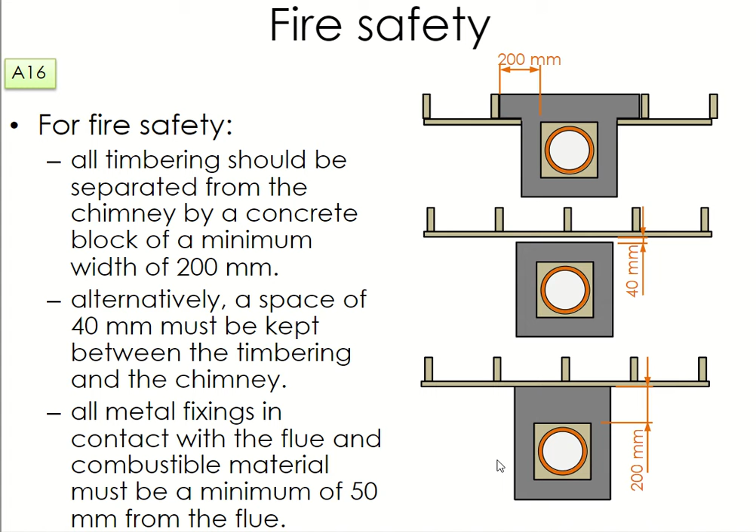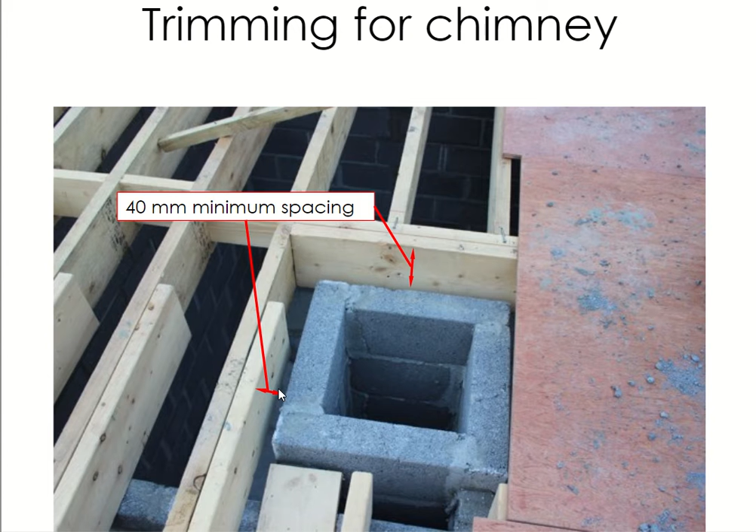Okay, so this is just kind of a real image of it. So you can see this is your fireplace or your chimney even being built up with your normal concrete blocks. You can see there's a gap here between the timber and the chimney of 40 millimeters, and that will be at all 4 sides.

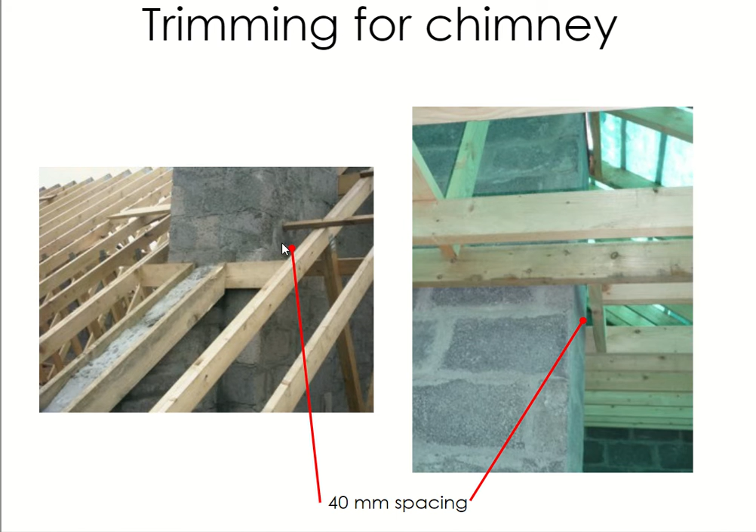Moving on to the top of page 96, we're on 17. So we're talking about a party wall. So what is a party wall? A party wall is a wall that's between 2 neighbouring buildings. So if you live in a house that's attached to another house, there'll be a party wall in between them. It's basically just a thicker wall, and the idea is that it reduces noise.

So it's vital that if there's a fire in one of the buildings, say in house A, that it doesn't go straight into house B because they're attached. So by building a party wall, we want it to be able to prevent a fire spreading from one house to the next.

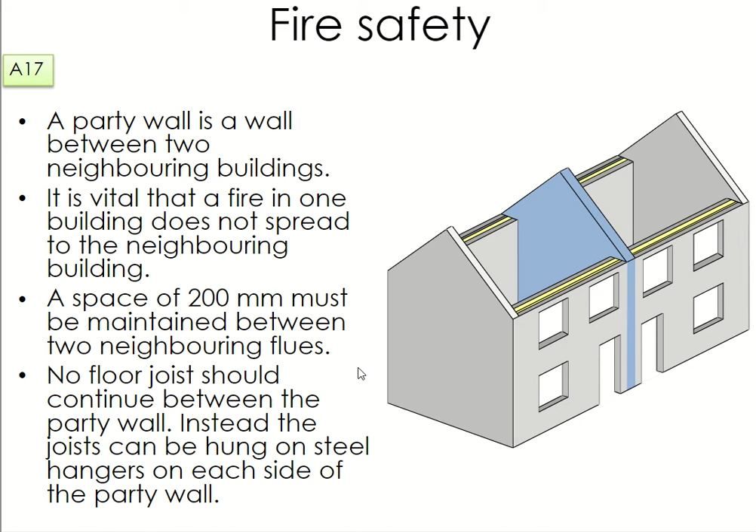A space of 200 millimeters must be maintained between the neighbouring flues. So imagine this is the party wall, and there's a chimney in house A, or a fireplace in house A, and on the other side of the party wall, house B has a fire. The 2 chimney flues need to have a gap of at least 200 millimeters between them, so that if one chimney was to catch fire, they'd be less likely to affect the other one, unless it was very severe.

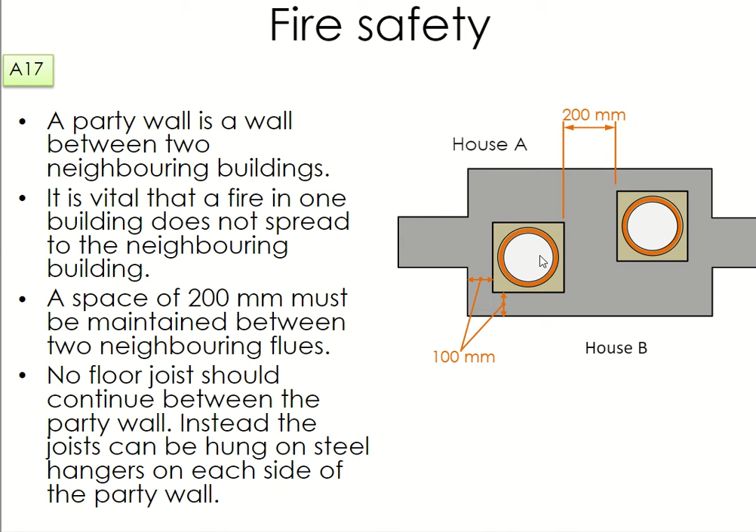And no floor joist should continue between the party wall. Instead, the joist can be hung on steel hangers on each side of the wall.

What the final point means is that the timber joists from house A should not go straight through to house B. They should have separate joists, or that goes for any piece of timber - separate pieces that should not go into the next house in case they catch fire. We use a steel bracket that fixes them to the party wall instead. The idea is that the party wall is a complete divider between house A and house B.

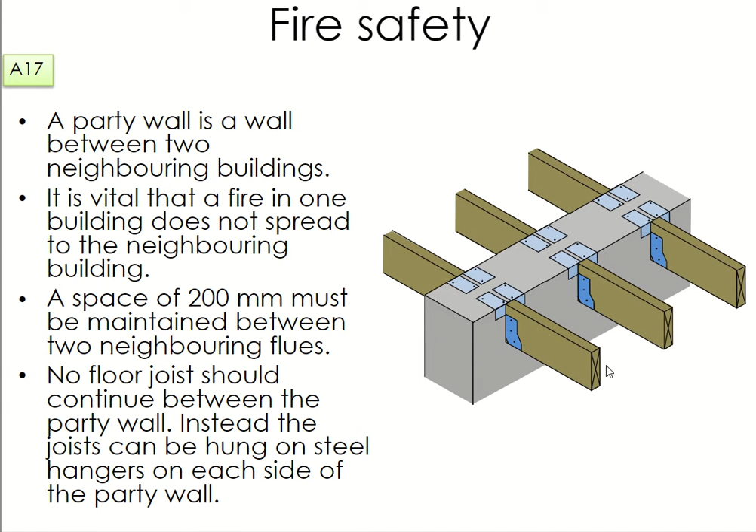Moving on now to 18, which is looking at carbon monoxide. Carbon monoxide is being described as the silent killer. So in that section, what do you need to do? You need to explain what carbon monoxide is and how it can be created in your house. I'm sure everyone has an idea of what carbon monoxide is.

It's a gas that is released mainly from burning fuel. It's a poisonous gas, and the thing about it is you can't see it, you can't taste it, and there's no smell of it. Just to go through the points here quickly, and you can write them in your book: when fuel is burned, carbon dioxide is produced. Carbon dioxide is made up of two molecules - this is kind of scientific - oxygen and carbon. It's not too important that we know that, it's just there for your own learning.

What we do need to know is when fuel is burned and starved of oxygen due to poor ventilation, carbon monoxide is produced. So if you have a fire in your house, fireplace, and you're burning turf or coal, and the fireplace doesn't have adequate oxygen coming into it, there's a very high chance that carbon monoxide could be produced and present in your house. It's a poisonous gas, it can be fatal, and as we said, it's colourless, odourless, and tasteless - you've no idea it's there.

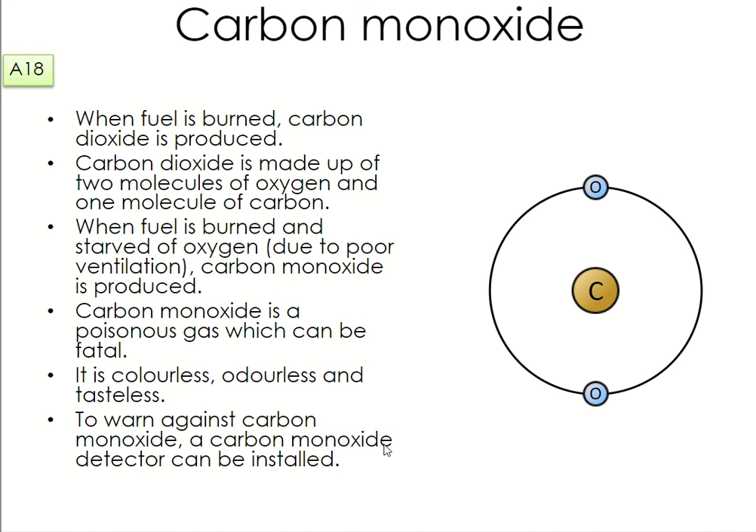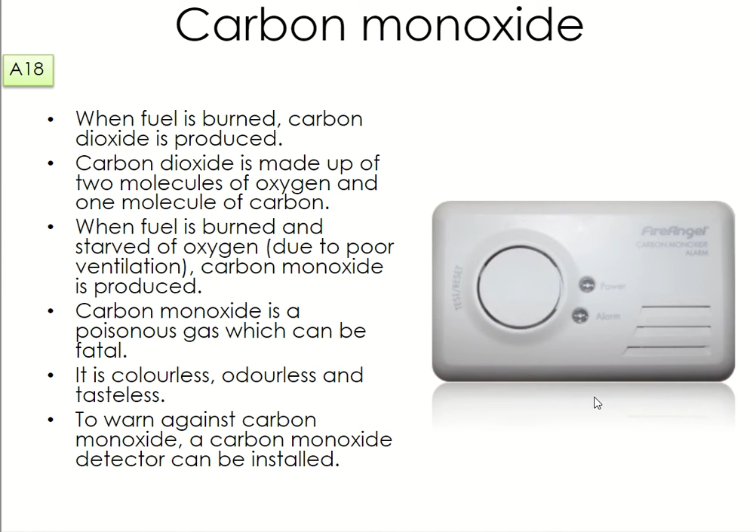This is 19 - carbon monoxide buildup can be prevented. We have 6 steps for preventing carbon monoxide. First, we can ensure that all boilers are regularly serviced - so if you have a back boiler behind your stove or range, it should be regularly serviced. Ensure that the fire has adequate ventilation, so every fire you have should have ventilation. An open fire would obviously have ventilation, but if you have a stove or some kind of enclosed range, you need to make sure that there's ventilation getting in.

There is usually mechanisms on a stove that allow you to increase or reduce the amount of air or oxygen that gets into a fire. Install wall vents - so if you have ventilation, wall vents, or open your windows, window vents, or any kind of vent. The idea of the vent is that some of the carbon monoxide gas would be able to get out of the house, and at least it would reduce its fatality to the occupants of the house. Finally, all homes should have a carbon monoxide alarm in the same room as the source.

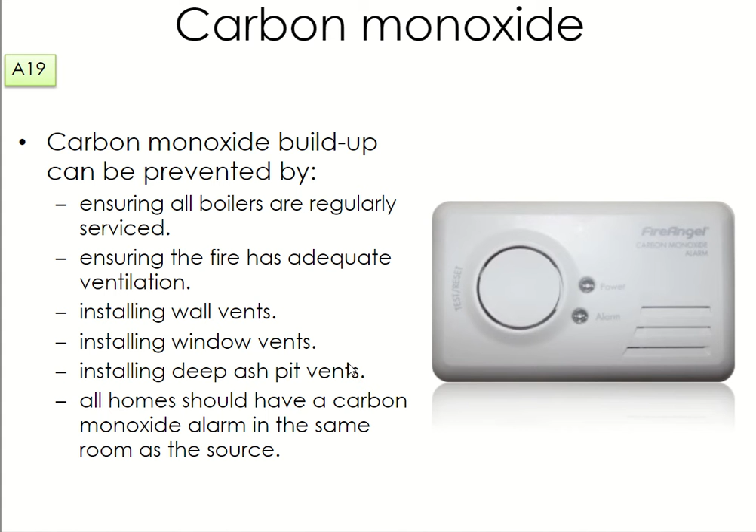So the source would obviously be your fire. Okay,

So now we're kind of looking at wind stability for the chimney, so how high would we build a chimney? Obviously we don't want it to be too high because there's a risk that it'll catch a lot of wind, especially in Ireland. So chimneys must be designed to withstand the wind. The height/width ratio is the most important design factor to achieve this.

So we're talking about the height of the chimney, the back end, usually along the ridge of the house, which is the middle of your roof, the highest point of your roof. And B here is the thickness or the width.

Because the wind is different in different parts of the country, a guideline map is used to determine the sizing of the chimney. In other words, if you live along the coast near a beach area or the sea, it's going to be a hell of a lot more windy than if you lived in central areas, or even in the centre of Ireland, the Midlands. You wouldn't have as severe wind.

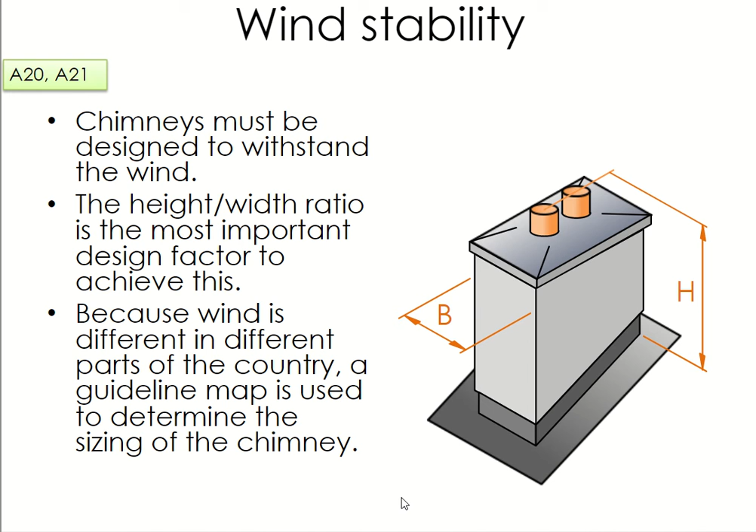So the map they use - as you can imagine, Donegal is on the highest end of the scale, being the yellow. You don't really need to know this, but it's just for your own information. Around the Midlands they would be the best area, and even around the Dublin area would get less wind. Most of the wind and storms that come into Ireland come in from the Atlantic.

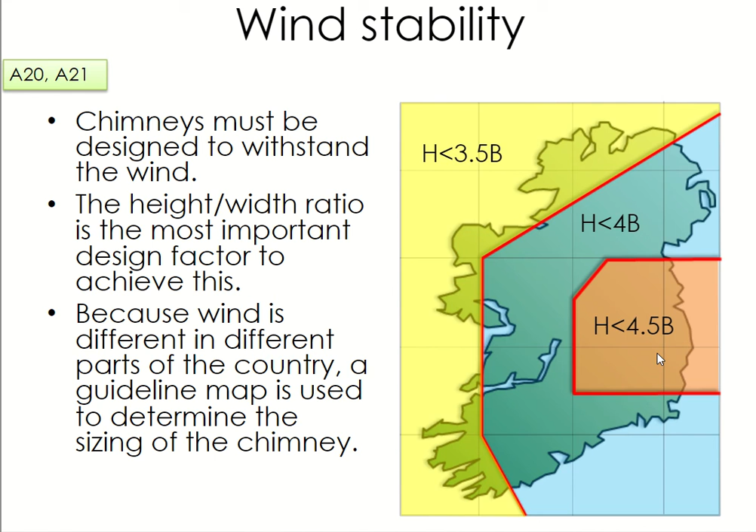So moving on - actually, just to go back, in your book, at the top of page 97 there is this map, and they want you to fill in the missing information: 3.5, 4 and 4.5. That's just the ratio. Again, it's not too important, and you will never get asked that in the exam, but it's in the book, so we may as well follow it out.

Now, moving on to more important stuff - backdraft, so it's on page 97, question 22 and 23 I think.

So when the wind blows against a roof, it creates a zone of pressure and a zone of suction. Here you have the wind blowing in against the house from this side, and afterwards the wind creates a pressure zone. You can see here now, it'll create a pressure zone - basically the pressure zone is on the side where the wind is hitting your house.

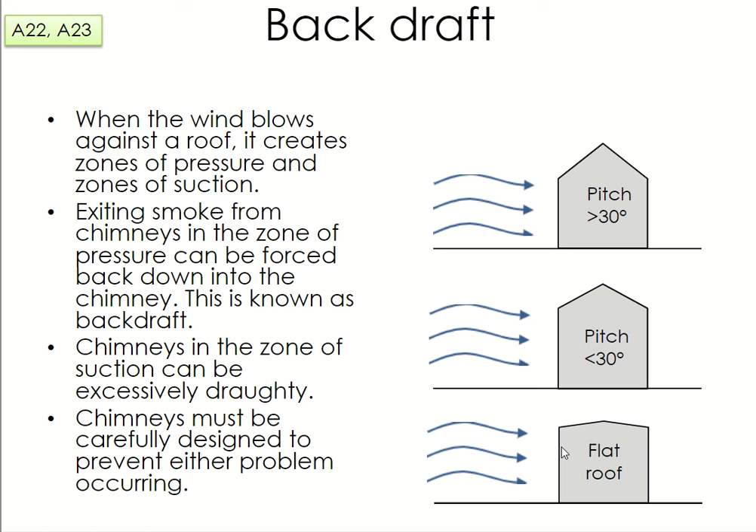So this is the stormy side of the house. You can imagine if the wind's coming in from the Atlantic, from the west, it's going to create a pressure zone. Then on the other side you have the suction zone - if you were to stand there, it'll be a lot more sheltered. So when the wind blows against a roof, it creates zones of pressure and zones of suction: the pressure zone is on the side that the wind is hitting the house, the suction zone is on the sheltered side.

Exiting smoke from the chimney in the zone of pressure can be forced back down into the chimney - this is known as backdraft. I don't know if you've ever heard of backdraft or if it's ever happened in your chimney. Chimneys in the zone of suction can be excessively drafty, so you can get a draft coming down the chimney, and the chimney must be carefully designed to prevent either problem occurring - this is important in terms of the design of the chimney. In other words, this is why the chimney will always be higher than your roof.

It needs to be a certain height above your roof, so that the smoke coming up the chimney doesn't get caught in either zone - the pressure zone or the suction zone. You want it coming out above the roof, so if it does hit any wind, it's above your roof and it'll blow away. You can see in this image, I think it's on question 23, they want you to indicate the zone of pressure and the zone of suction on the three images.

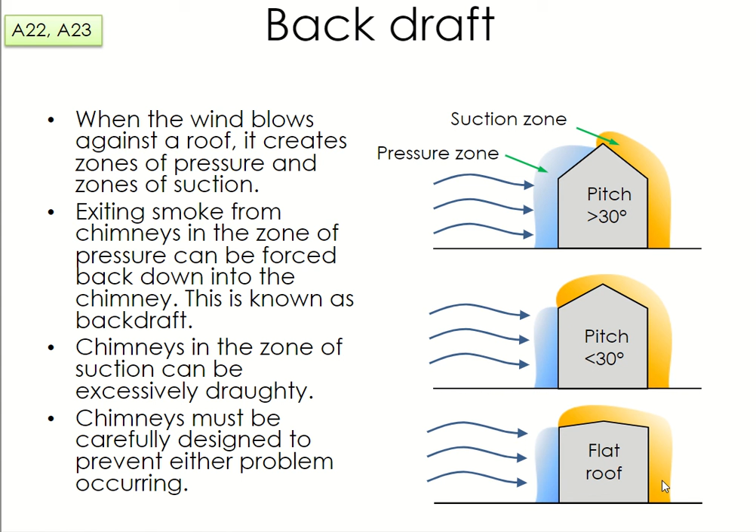You basically just need to highlight the blue area for the pressure zone and the orange area for the suction zone. Again, the suction zone will come up over your roof as well—that's the suction zone. It's obviously different depending on the pitch of the roof: the bigger the pitch, the less likely it is to come over to the other side of the roof. The lower the pitch, or if it's a flat roof, it's a lot easier for the suction zone to come across.

Question 24, bottom of page 97, we're nearly done now. This looks at how we decide on the heights and ratios for the chimney, especially in terms of backdraft. To prevent backdraft, the chimney stacks must be built with a certain amount of clearance from the roof—a certain height above the roof. The height of the roof will be here at the apex or the ridge, which is your highest point of the roof.

For roofs with a pitch more than 10 degrees, in other words not a flat roof, if the chimney is less than 600 millimeters from the ridge, then the chimney must be a minimum of 600 above the ridge. So if we look at the first picture, from the ridge point to the chimney flue, if that distance is less than 600 millimeters, then the chimney must be a minimum of 600 above the ridge line—so the chimney flue must be at least 600 millimeters above it.

If the chimney is greater than 600 from the ridge—you can see here 600 isn't even reaching the ridge in picture 2—then the chimney must be a minimum of 1 meter above the highest point of contact with the roof slope. In other words, the highest point of contact for the chimney with the roof is usually at the back point here.

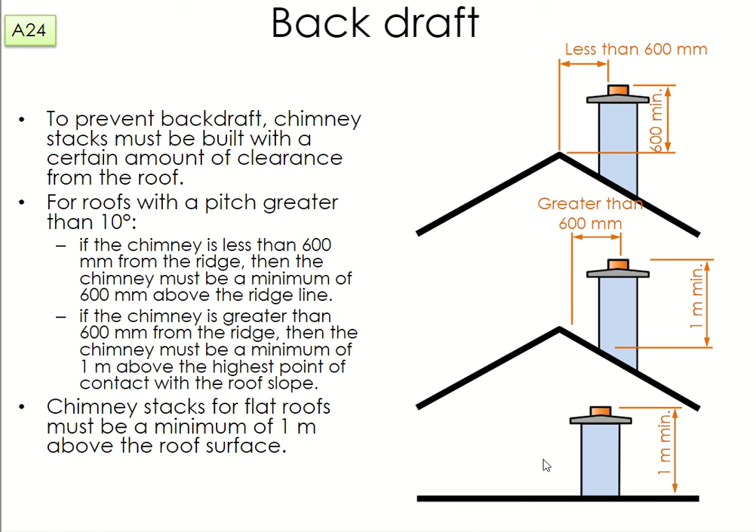Moving on now to the final couple of questions: weatherproofing the chimney.

To prevent damp entering the house, a DPC—damp proof course—tray is used to separate the portion of the chimney above roof level from the internal portion of the chimney. These trays are usually made from lead, so if you look up at your chimney, there's lead flashing going up the wall slightly that connects it to the roof, going underneath your slates or tiles. That's just to stop water coming down along the blocks of your chimney and into your house—so it's a lead flashing. Alternatively, you can buy prefabricated ones.

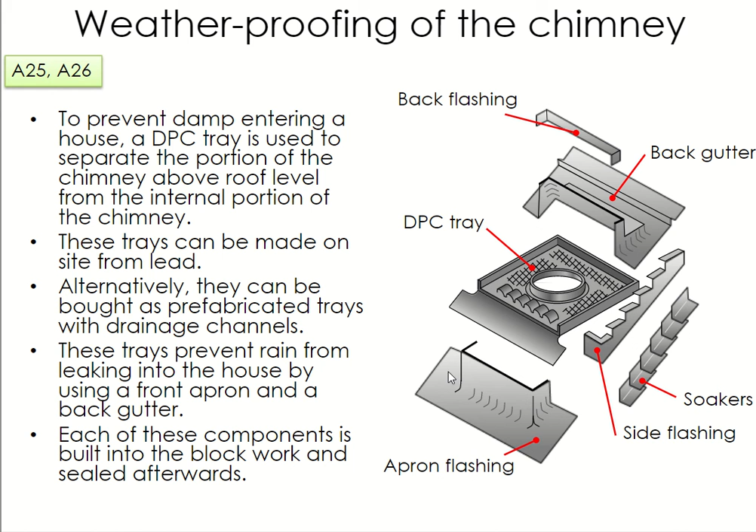So you have the back flashing and the back gutter. You have a DPC tray. You have your soakers along the sides, and at the front you'll have an apron flashing. You also have the side flashing as well. In other words, the flashing is kind of the first layer, and the second layer then is either your soakers or your back gutter in the back. So there's two layers.

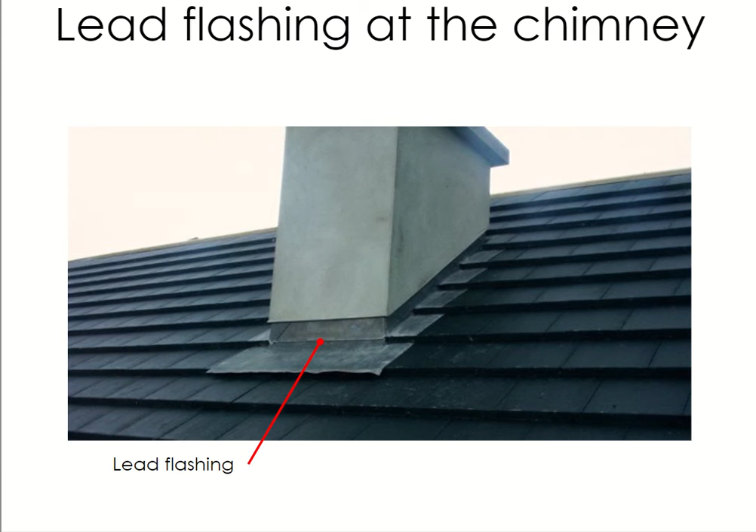Moving on to the final part, which is 27, you have to label and add appropriate measurements to the diagram given on the bottom of page 98. So it's basically a detail of a chimney coming through the roof. Again, we'll do all our detailed drawings when you get back to school in 2 weeks or 3 weeks time.

So you have to label the parts. Number 1 there is the stepped flashing. Number 2 is pointing to the DPC tray. Number 3 would be pointing to the front apron - so this is this area around here. So 3 is the front apron, 2 would be the DPC tray, and the stepped flashing will be number 1.

Again, the missing measurement they want you to fill in here is 150, okay? So in other words, from the point of the blockwork coming out through the roof, it needs to be at least 150 millimeters above before the plaster comes down over the lead flashing.

Number 4 then on the other side, number 4 is the cover flashing - so it's the first layer that goes on. And then the back gutter lead layer will go on top of that, that will be number 5. Number 6 is your tilting fillet here - it's just so the water doesn't come back up the way. This will stop the water from coming up the way, and it also raises your slates slightly.

Number 7 is the gutter board, it's just a piece of wood. Number 8 is this piece of wood in here - it's the batten, okay, it's just where the lead flashing or the lead gutter sits on.

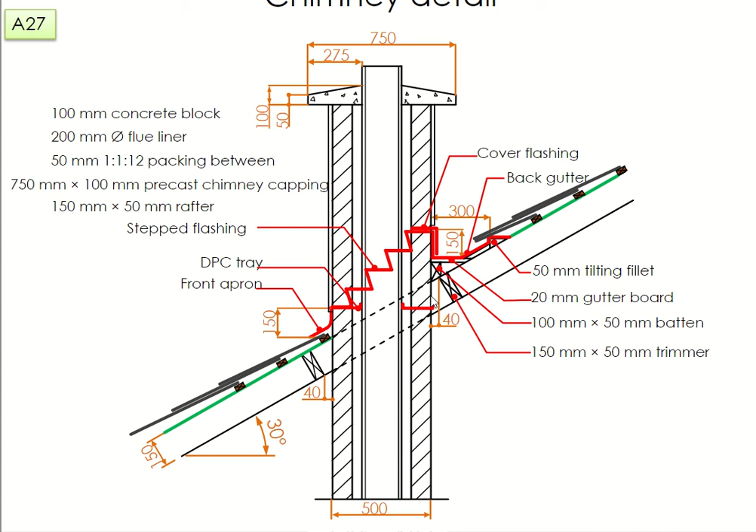And the final part, number 9, is your trimmer - again, it's another piece of wood. Remember the trimmer needs to be at least 40 millimeters from the chimney on either side. And that's it, okay, stop our video here.